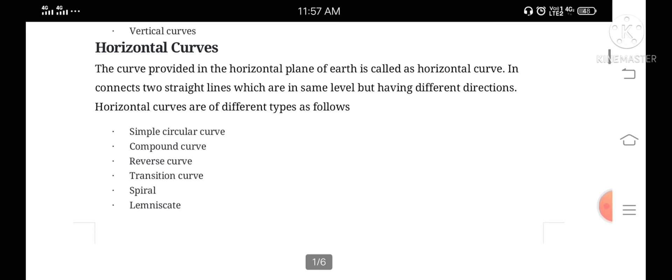Two straight lines which are at the same level but have different directions, connected by an arc, form a horizontal curve. Now students, horizontal curves are further divided into the following curves. The first is simple circular curve, second is compound curve, third is reverse curve, fourth is transition curve, fifth is spiral curve, and sixth is lemniscate curve.

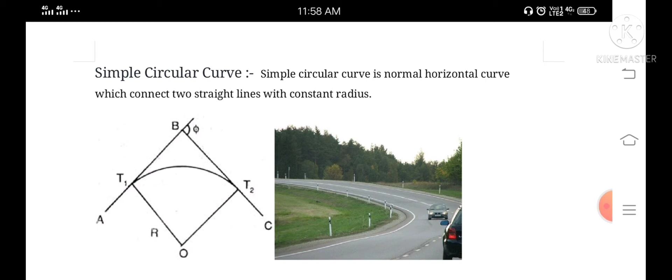Tangent AB and tangent BC are connected by an arc, that is T1 and T2. So T1 to T2 is the length of the arc. It is a simple circular curve, friends. Now the next one is compound curve.

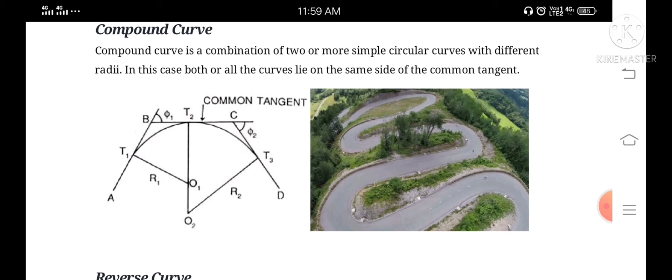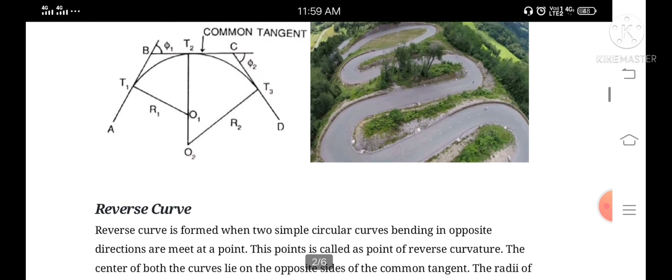Now next is the reverse curve. What is a reverse curve? A reverse curve is also formed by connecting two simple circular curves, but bending in opposite directions, meeting at a point.

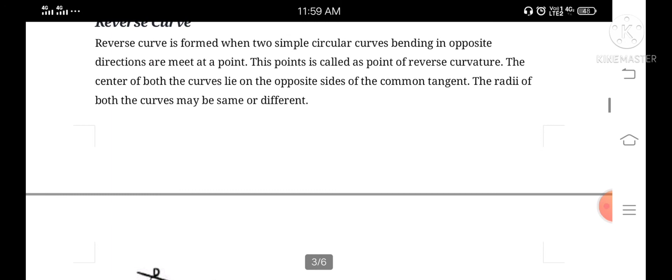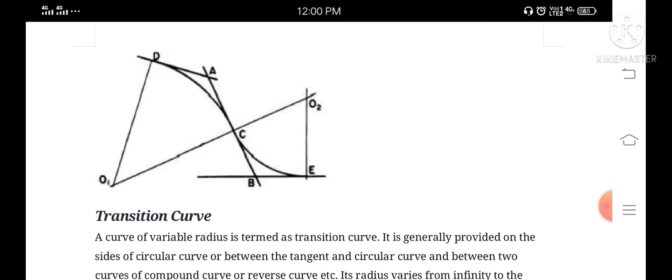The first simple circular curve is D to C and the second simple circular curve is C to E, but they are connecting in opposite directions, so that's why it is called a reverse curve. Now next is transition curve. What is a transition curve? A curve with varying radius is termed a transition curve.

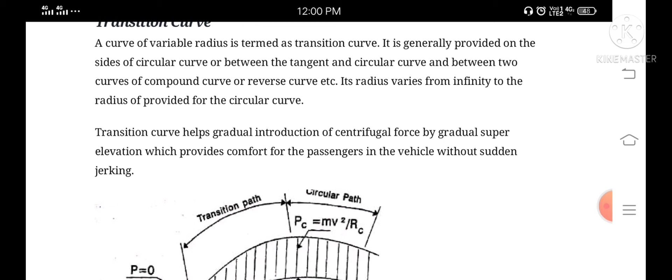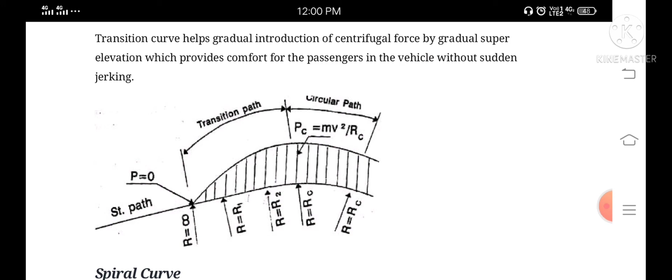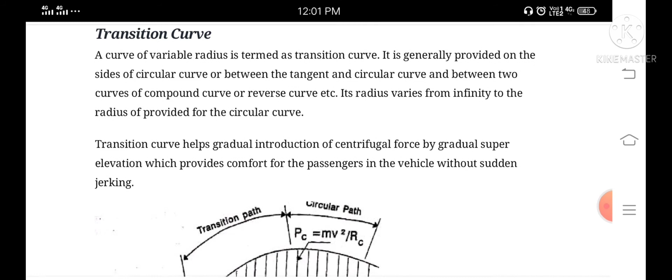A transition curve is also like a simple circular curve but connecting with a different radius, which gives a transition curve. Generally a transition curve is provided on the sides of a circular curve, between the tangent and the circular curve, or between two curves of a compound or reverse curve. As mentioned in the diagram, the first is a transition path and the second is a circular path, the circular curve.

Now the next one is the lemniscate curve. It is also a type of transition curve, used when the deflection angle is very large. The important thing is that the deflection angle is very large. In a lemniscate, the radius of curve is more if the length of chord is less.

Next are vertical curves. Vertical curves are provided in a vertical plane of earth, so they are called vertical curves. They are generally provided in hilly areas where the alignment of the road has undulation, when the ground is non-uniform or has different levels at different points. In general, this curve is like a parabolic curve.

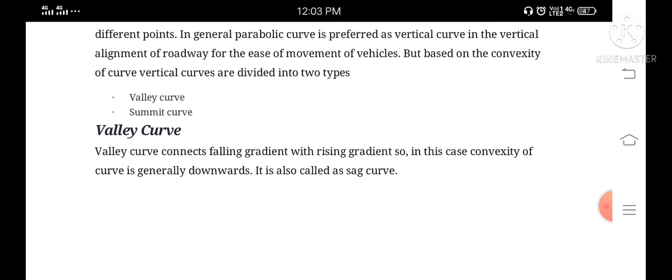Vertical curves are provided in road alignment for the ease of movement of vehicles, and based on the convexity of the curve, they are divided into two types: the first is valley curve and the second is summit curve. What is a valley curve? A valley curve connects a falling gradient with a rising gradient, so it is also called a sag curve. Next is the diagram shown.